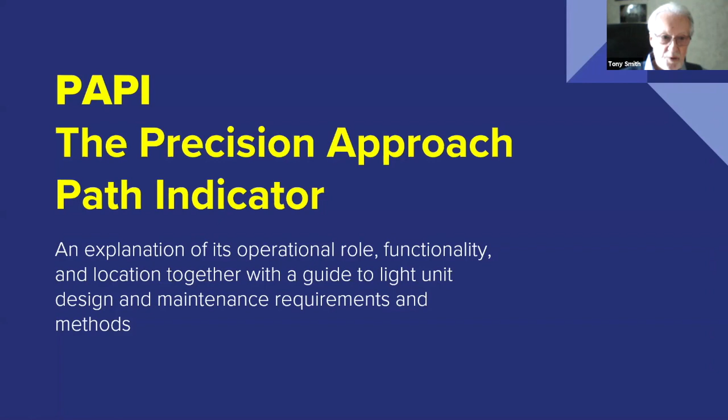So the precision approach path indicator. What I intend to talk to you about this afternoon is its operational role, its functionality, and the location of it in relation to the runway threshold, and also some guidance on the light unit design, and importantly, the maintenance requirements and the methods of doing that maintenance. So if we move on now to the first of those, let's look at an overview of the PAPI.

I want to say right at the beginning, what I'm talking to you about this afternoon is based on what you'll find in international standards. I could talk a lot about how we went through various phases and things we tried, but I'm saying this is the PAPI you will meet in everyday life now. It's in the international standards, all descriptions, and all the key issues I want to talk to you about are related to that. Things that you will have to do in procurement, installation, and operation.

And I've got several headings that I've broken the talk down into. The first is the visual cues information that PAPI provides to the pilots. What is it the end user is actually getting out of PAPI? What is it the pilots have and need, and why is it meeting their need? And along with that, the second point is, well, what's the actual signal format and how does it work? How do we convey by visual signals to pilots the information they need?

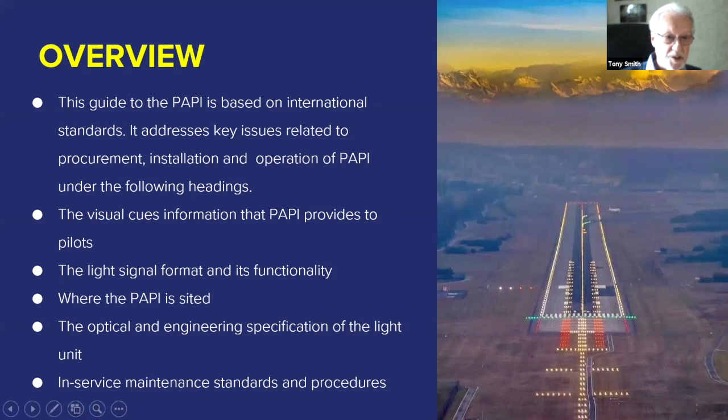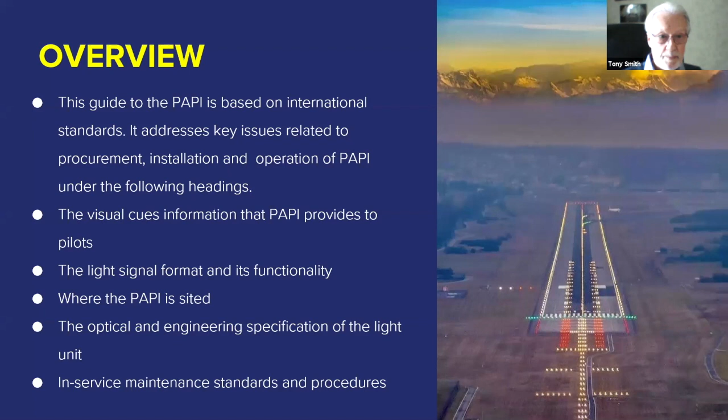And then, of course, well, I've done the research, and I've proved it's practical to do it, and it meets an operational need. But now the biggest job is actually doing the optical and engineering specifications and the manufacture to a unit that in everyday service will provide this requirement. So engineering is a very key part of the PAPI being a successful device. And then the last bullet point, but not the least by any means, the in-service maintenance standards and procedures for this particular part of the aviation ground lighting.

So let's look now at the operational role of PAPI guidance. It's a visual aid. I think all of us who have met here this afternoon know that that's what it is. It has an actual usable visual range in good daytime visibilities out to 10 kilometers in the undershoot. It can be seen quite early on as the pilot prepares to make the final descent towards the runway.

And that has its uses, particularly if there isn't any non-visual guidance. The sooner the pilot can settle onto the 3-degree glide path, which is the norm, and stabilize the approach there, get his power settings right, the better his approach will be in all sorts of ways.

It'll be safer and it'll be more repetitive as to where he touches down, and that has all operational benefits. So it can be very useful in all very good visibility conditions to stabilize the approach way out. And so that second bullet point, amplifying that, yes, what we're looking for is to establish and maintain a stable approach on the specified glide path angle to an accuracy similar to what you would get if you're flying an instrument approach. That in a sense is the gold standard.

That we know from other research over many years. If you do approaches to that standard of accuracy performance, you have a very safe system. So PAPI enables you to do that without any non-visual guidance in many cases. The last point there is an important one and tends to be forgotten. We tend to go straight away to, well, what about the PAPI, where is it on the runway? But you need to start any process by saying, what are we using glide slope information for, apart from just stabilizing the aircraft on a nice 3-degree approach?

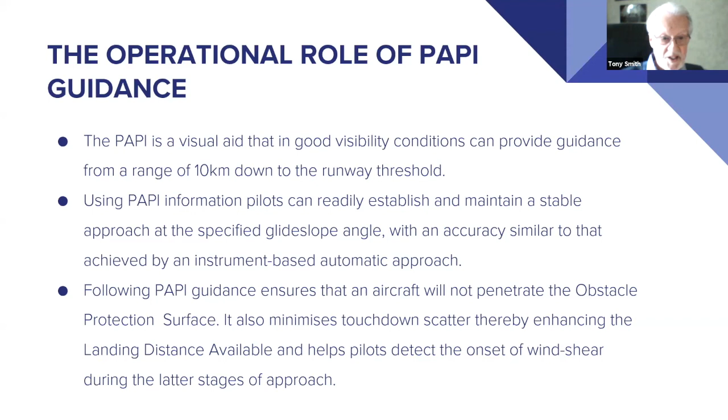And each of those 4 units is effectively something that projects a beam of light. The top half of the beam is white, the bottom half of it is red, and the transition from one color to another actually occurs over a very, very small angle. And that color change and the accompanying intensity change, which are all part of the signal, appear when you're actually flying in operational use to be instantaneous to all intents. It flashes, it clicks, it's attention getting.

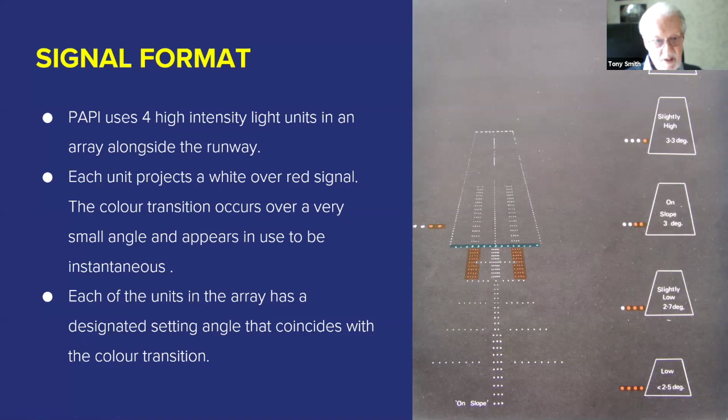So let's look at the setting angles a little bit more now. Here again is a diagram, available in all sorts of things, including the ICAO Annex 14, that shows you a PAPI and in fact an APAPI. In some cases an APAPI will be adequate, particularly for smaller aircraft, general aviation. An APAPI will provide adequate guidance where you just have a red and a white. So you have 3 signals then: 2 reds, 1 red 1 white, and 2 whites. That can be very useful in quite a lot of settings.

So you've got those 4 setting angles. They're 20 minutes of arc apart, a third of a degree apart in the normal PAPI configuration, so that from top to bottom you've got a total coverage of 1 degree, and those angles designate the place where you get a change of state in the number of each coloured light. And so I call this a digital signal format. It's very, very evident which state it is. There are 5 states, and only 5 states.

And this is from background knowledge. Human factors says for a glide slope indicator, 5 bits of information is the ideal, certainly for larger aircraft. You don't need any more. You really don't optimally, in many cases, need any less. That is what PAPI provides: 5 discrete states, where it's very obvious which state you're in. And in practice, as we found during our trials and over years, it provides a very stable, accurate approach.

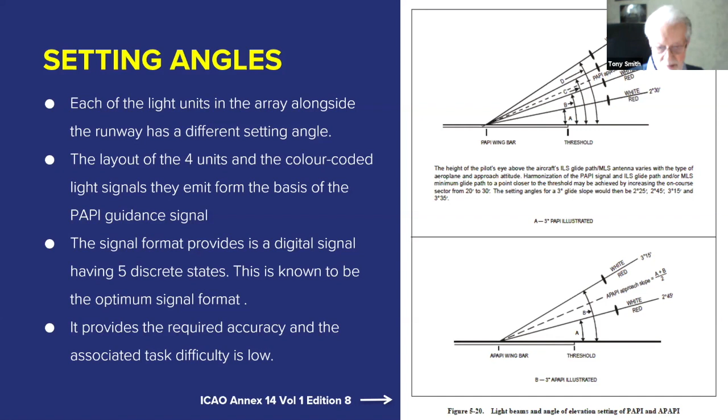Let's move on now to this 3rd area, which is the choice of location. This is a very important factor. Where do I put this device in relation to the threshold? Normally we refer to distance upwind of the threshold. We've got to bear in mind, as I said, where the obstacle protection surface is, so that where we put it will give us that clearance above that surface to get the element of safety on the approach that we need. And then secondly, as we come to the runway, the wheel clearance at the threshold must be a certain value.

This takes care of the fact that even with the best aid in the world, a pilot flying a PAPI, there are small variations from the glide path. It's also true with the ILS. The ILS, the autopilot, they're not absolutely perfect. They won't drill absolute lines in space. Day to day and place to place, there are variations. And that area of uncertainty is taken out of the equation by saying, in the datum case, we'll have a wheel clearance of a certain amount, and you'll find this in Annex 14. The smallest shown there, for smaller aircraft, is 6 meters wheel clearance at the threshold, but for other aircraft as much as 9 meters. So that has to be built into the decision as to where to put the PAPI.

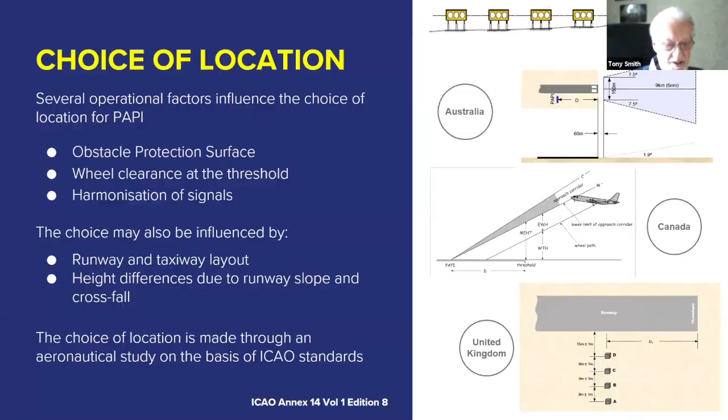So what are some of these operational issues? Well, I keep saying, and it's important to say so, this is a presentation based on showing you what the ICAO standards are. However, having invented this device, I have to say that when I look around now, I look at the words which have been massaged a bit over the years. If you look at Annex 14, basically we've got a specification that is 40 years old for the location. The PAPI itself as a device doesn't need any change, but some of these issues need addressing because operational circumstances have changed and will go on changing.

And I believe, to say to the aviation committee, it's about time that those parts of the standards were reassessed. And I believe, to the benefit of everybody, our safety would, if anything, be enhanced, and application would be easier and more in keeping with the sort of aviation we're seeing now and we'll see in the next 20 or 30 years.

And the harmonization method that assures this wants to make sure that we take account of the actual performance of aircraft. The whole thing about PAPI installation, fairly shortly after it was adopted, the 747 became the dominating concern of everybody. And that makes a location which is suboptimal in many ways in the harmonization process, which we could go into a little bit more. But there are ways around that to achieve a suitable answer. But it gives you an additional problem.

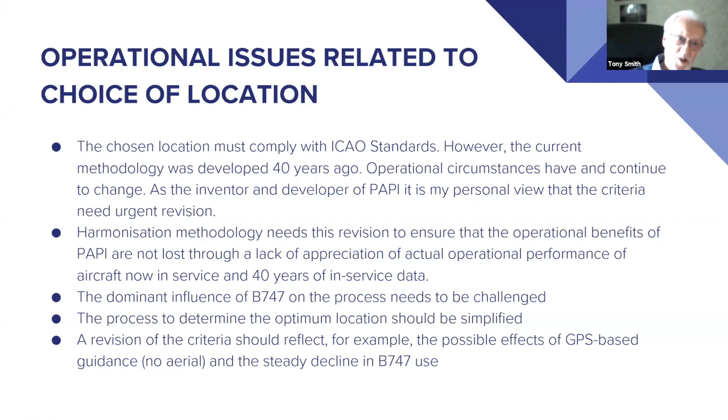So if we move on now, having looked at some of those operational issues, let's look operationally at how this PAPI functions. Well, PAPI, first of all, was designed to meet the 4 criteria that any good visual aid has for visual signaling. It's a visual signaling exercise, and for any visual signal, you need a signal that's conspicuous, which is legible, which is comprehensible and credible.

And putting it another way, conspicuous: when you want to start using it, one glance in the general direction of where you expect it to be, it should stand out and say, here I am, I'm ready for you to use it. It should be conspicuous in the background. And of course, in a busy urban environment, a busy environment with an airport with an awful lot of lighting on, it's important that the PAPI can be quickly located and be conspicuous to the pilot.

And then the signal's legible. It's all very well if we've got a row of lights there, but if the pilot can't discriminate between the 4, and he just gets a sort of blurred bar of lights and can't get any real information out of it, it's not legible. If you can't read the signal, it's not doing its job. So it needs to be legible.

It needs to be comprehensible. In other words, when the pilot sees these lights and sees them change, he or she understands what's happening, and says, not only can I see what's happening in the PAPI, but I believe it's telling me the right thing, it's credible. Just go back to the comprehensible. One of the features of PAPI is it's so easy to learn and understand.

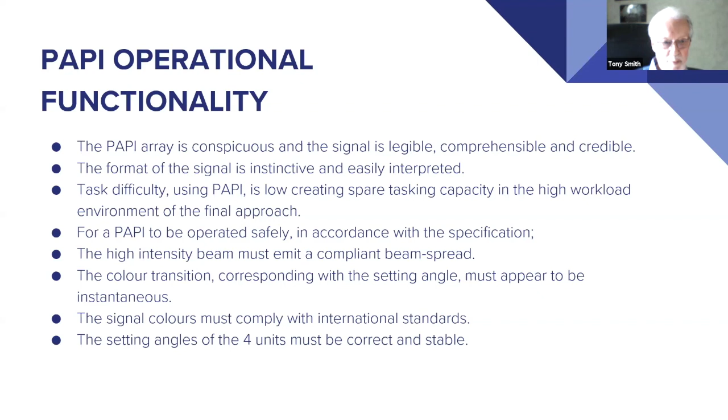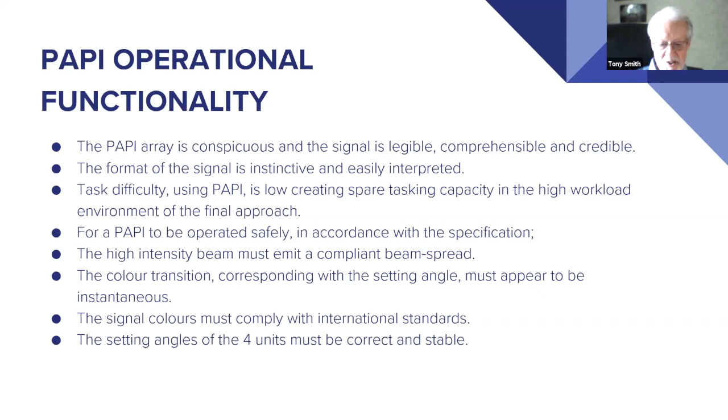And the setting angles, which are the angles of where the transition is, they must be correct and stable in the unit. The whole usefulness of PAPI relies on those 4 setting angles. And so when it's in use, those angles must be displayed correctly and in a stable manner. So let's look at the thing that influences that, and that's the optical and engineering design of the unit.

There are 4 elements to this specification. From the lighting point of view, particularly, first of all, the isocandela diagram. The design must provide that specification, shown by the isocandelas in the diagrams you'll find in Annex 14.

Secondly, the colours that are provided with the filter material or the light source, or the combination of them. They must be signal colour white, signal colour red, and the more saturated the red can be, the more near it is a perfectly saturated red, the better from a recognition point of view. And then another thing in the actual optical design is to produce and maintain this sharp signal transition.

That's very, very important in the design, that you have built in that very sharp transition. And finally, from the optical point of view, that you then are able to have some device you put, you measure where the unit is pointing for the setting angle, that angle that you then set by whatever means you do it is indeed the setting angle you require. It is the transition signal angle as well. They need to be harmonized at all times in the optical design.

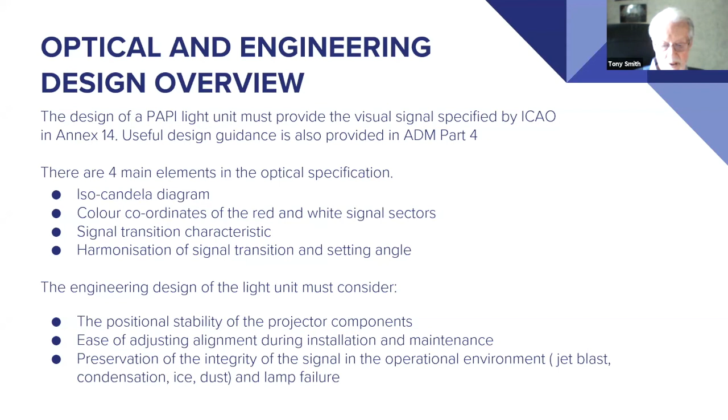So going on now to look again a little bit more at engineering design principles. Just to go back to very basics, what we're talking about here with the PAPI is a slide projector. And I guess almost everybody watching today will have had a slide projector if they still haven't got one. The days when you took 35mm pictures with your camera and then did a slide projection for all your family and friends, projecting it onto a wall or a screen, focusing it on the wall. It's a nice sharp picture. Well, that's basically what PAPI is.

It's a light projector, but on the wall you will get an area of light. The top half would be white, the bottom half would be red, and there would be no fuzzy area in between. You should focus it so it's a sharp line between the white and the red. For the PAPI, we don't focus it on the wall in our room, we focus it at infinity. And that's the way in which we get a sharp transition at all operationally useful ranges.

As I already said, make sure the optical components are rigidly related one to another, and that you've got leveling plates and setting angle plates that really do tell you the right information. You know where the beam actually is that's coming out of your PAPI.

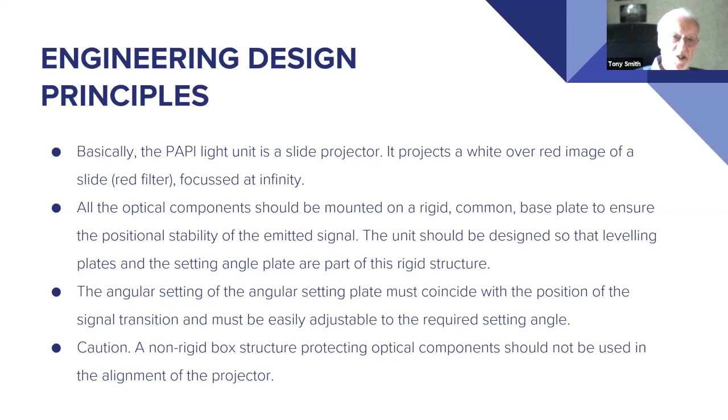So having said we've researched, we've developed, we've installed, we've got an aid which does the job, how are we going to ensure now we've got it in place, that it does continue for the long term to provide what it's there to provide? And this is where maintenance comes in. And I'm so glad that I'm able to say a lot more about PAPI maintenance now than I could a few years ago, because adequate maintenance has been very much a neglected area.

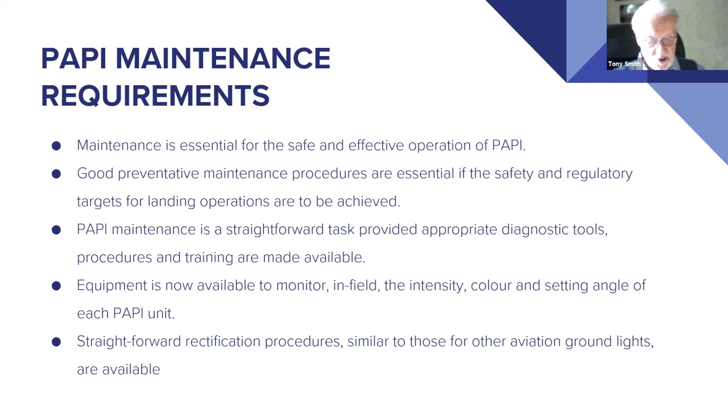But as we'll hear, work has been going on now to actually provide proper tools, because maintenance is actually essential if you're going to have safe and efficient, effective operation of PAPIs. There has to be maintenance, and people who've owned PAPI have been struggling, a bit mystified about, well, how do I know if I'm providing the signal that I should have? Good maintenance means knowing that you've got what you should have and can verify that. That's important, and that's what's coming and is available now.

Good preventive maintenance procedures, so that the aid is available at all times when it's needed, day in, day out, night and day. And I want to say, for some of you listening who've got a PAPI and not quite sure how to maintain it, and perhaps a little hesitant about touching it because it's a precision instrument, it's actually quite robust and will stand up for itself, provided that you have got the right diagnostic tools to check its performance, that you've got the procedures to use that equipment, and that you've had the training to use it.

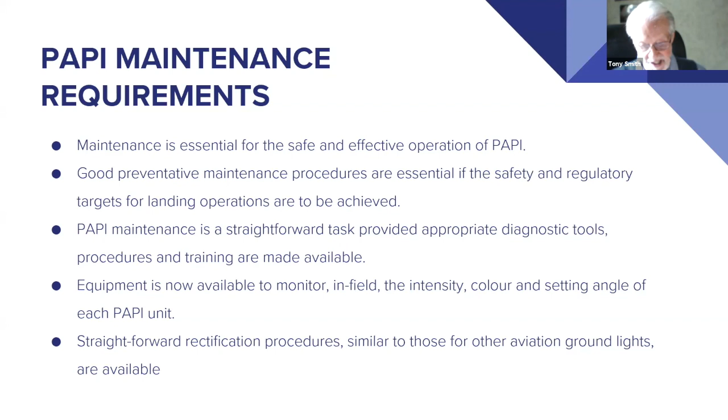So the key is having a device where you can sample what's coming out of the PAPI, and know how to use that device, have the adequate training, so that your use of that device will guarantee that PAPI is indeed properly serviceable. And of course, this equipment, as I've already hinted, is now available. I know at least one that will make the in-service, in-field measurements for you. It will measure intensity, it will measure colour, and the setting angle of each of the 4 units.

You have that information, and at first level, you can very rapidly know, well, is my PAPI serviceable or not? You can have a sort of pass-fail at the first level. But then you can go further if there is failure or partial failure, and PAPI does fail soft in that if you've got a 3-lamp device, if one lamp goes out, the PAPI is still usable, but does require maintenance as soon as you possibly can to replace the failed lamp.

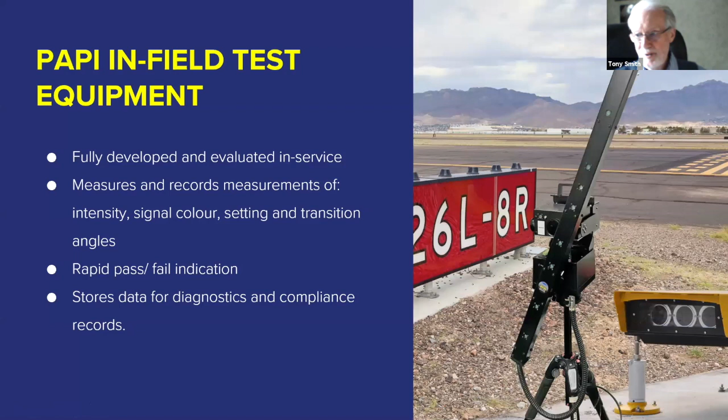So I think at this point, good place to stop talking and to move over to a phase of question and answer, I think, Robert. Thank you, Tony. That was absolutely wonderful. So there you have it from Tony, inventor of the PAPI, how it happened, why it happened, how it works, and how to make sure it carries on working in life. So I see we have a number of questions coming in.